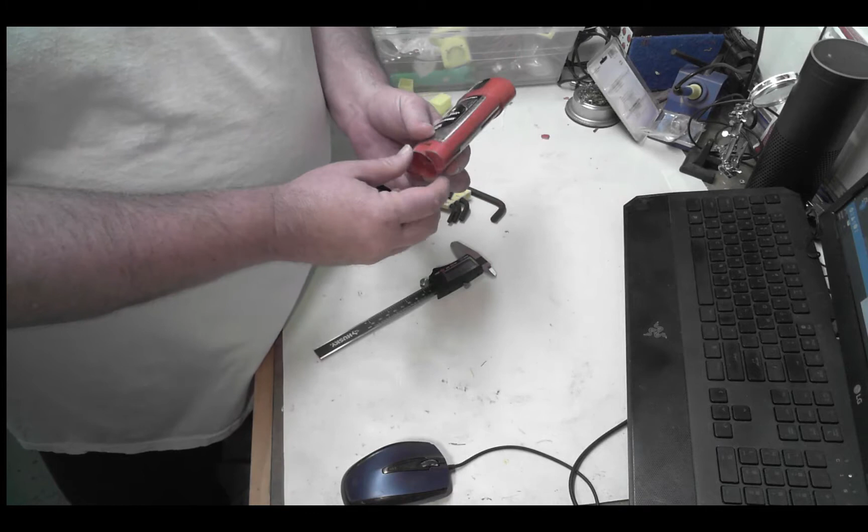So I pulled up all the stuff, started turning to get some deodorant out of it. Well, either I was going the wrong way or something was defective. This thing snapped right off. I'm like, well, I'll just be a little stinky today.

That's okay, but the bigger deal is now I've got to go back to the store and return the thing. I just don't want to deal with that. I have to drive a lot every day to get back and forth to work, and I'd rather not deal with it. So I chunked it all back in the gym bag and decided I'd make a project out of it. Help me smell better using 3D printing.

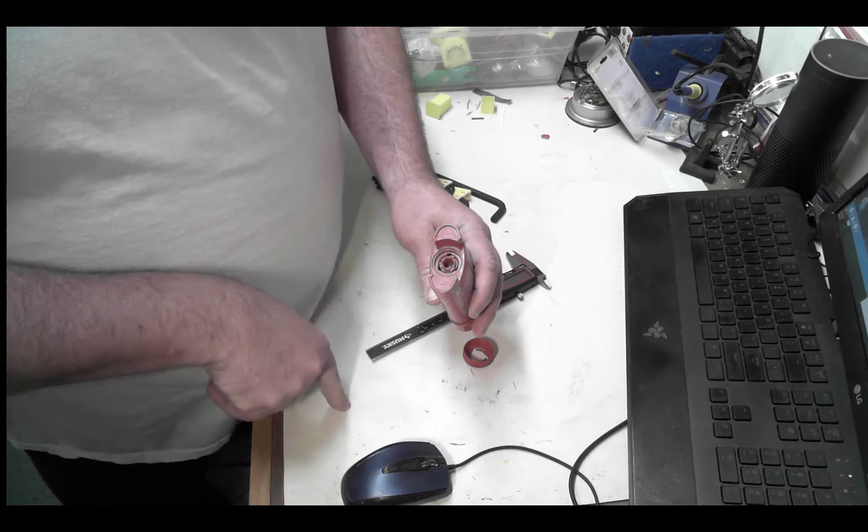So here's the deal. I got an idea how big that is, I can measure those things. I also looked - if you'll look right here, there's a hex opening. That hex opening just happens to fit a 5/16" nut. Now, I didn't pull out my metric ones on this, so maybe there's a metric thing in there, but it fits pretty good, so that's what I'm going to roll with. I got sizes of this, I got size of that, I know where it is, it's nice and circular.

I've got Fusion 360, I can make a model, and we can make myself smell better using 3D printing. So I'm going to model it up and show you guys doing that. I will show it printing, and I'll show you the results. So hang on, here we go.

Okay, so we know what the problem is. Now let's model up our solution. Pretty straightforward kind of guy. I did practice a little bit, I'll be honest, but I'll show you my mistakes and where I made them. So the first thing we want to do is make a sketch. There's a couple of ways to do this, but effectively this is a hex column on top of a round cylinder. That's all it is. So let's go do that and make it really easy.

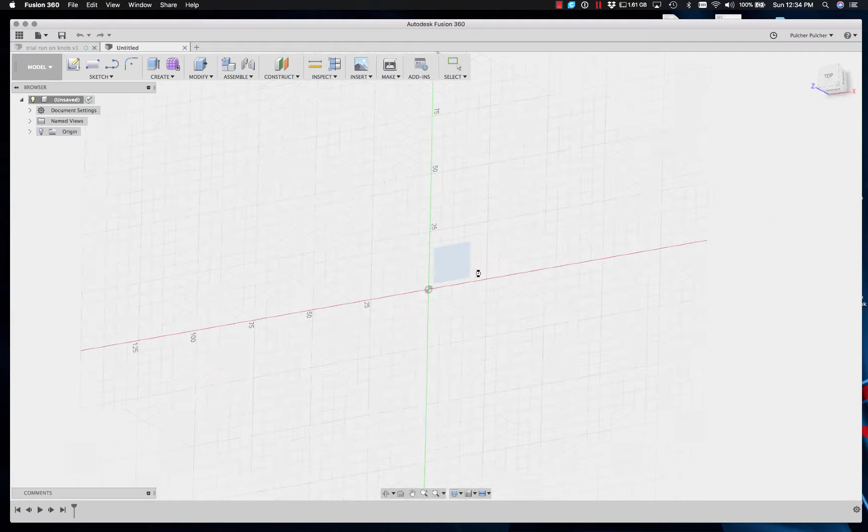So we make a circle on the x-axis. Get my calipers out. Seems I need to make this - let's call it 30. It says 33.5, and that's just on the outside of that. So let's call it 33 millimeters in diameter. So I'm going to say click. 33, tell it to go, and I need a height.

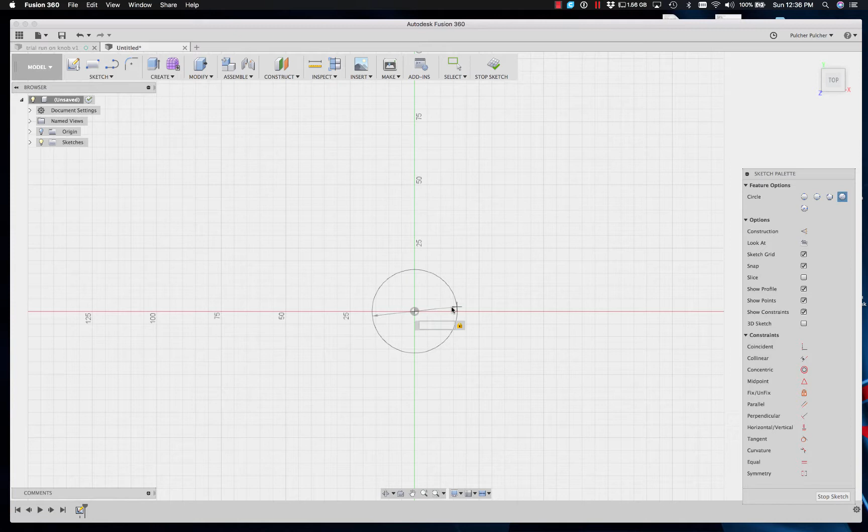It's a little difficult to get a hold of. Yeah, I'm going to call it - it says 12.8. I'm going to call it 12 in this case. Actually, I want just a little shy of that, so let's call it 11 this time. Alright, so then what we need to do is - that's 33, see we're all dimensioned up, which is great - and we can do this press pull business. Select this, I want to make a distance of 11 millimeters. And I'm making a new body, which is fine. And away we go. Dude, we're almost done.

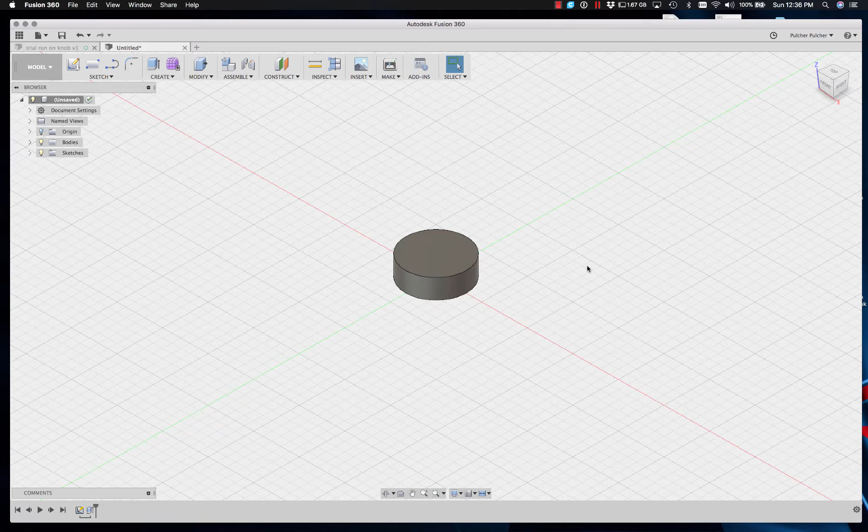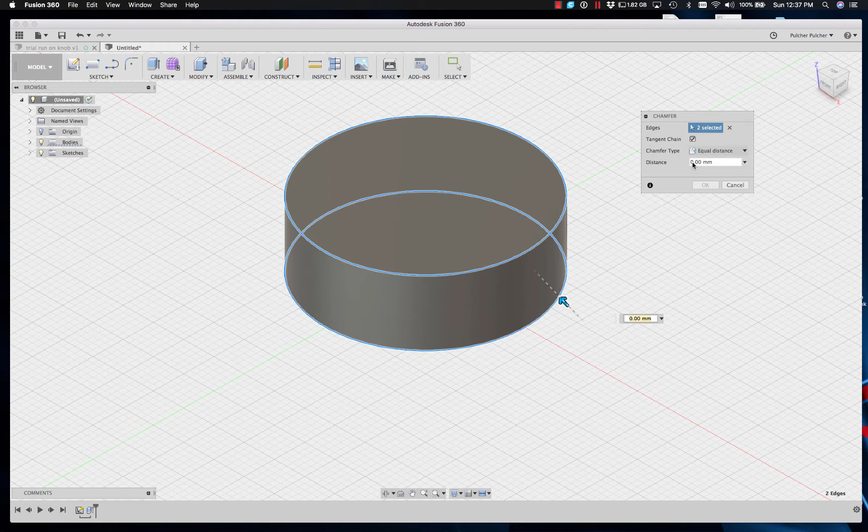No. Let's do a couple things first before we go any craziness. So I'm going to zoom in here. One of the first things I want to do, I want to grab that line right there, and I want to grab that line right there, and I want to make a chamfer, and I'm going to make the distance - what's 2 millimeters look like? Look good to you guys? So now what we have is a chamfer and a nice little donut here. Back to my home, make sure I'm looking at the right thing.

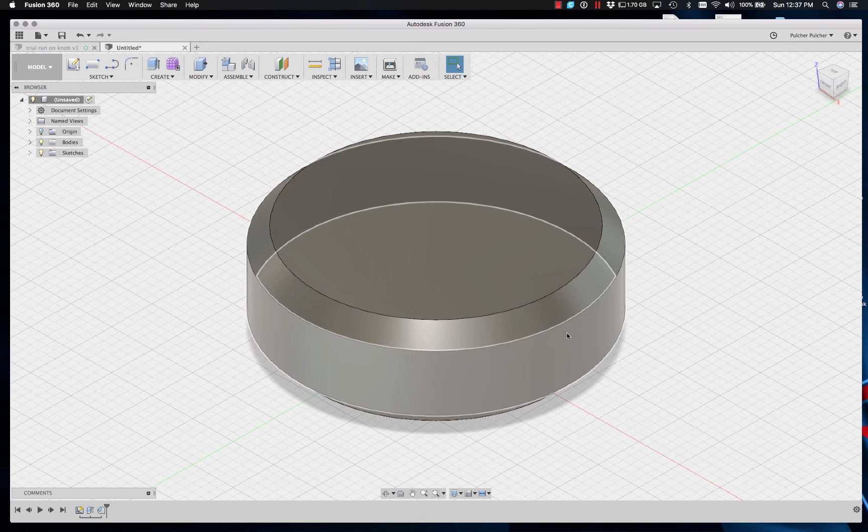Now the next thing I'm going to do is I need to make some indentation, because that's smooth all the way around, and you know when you're getting out of the shower and your hands might be a little moist, you need something to grip onto it.

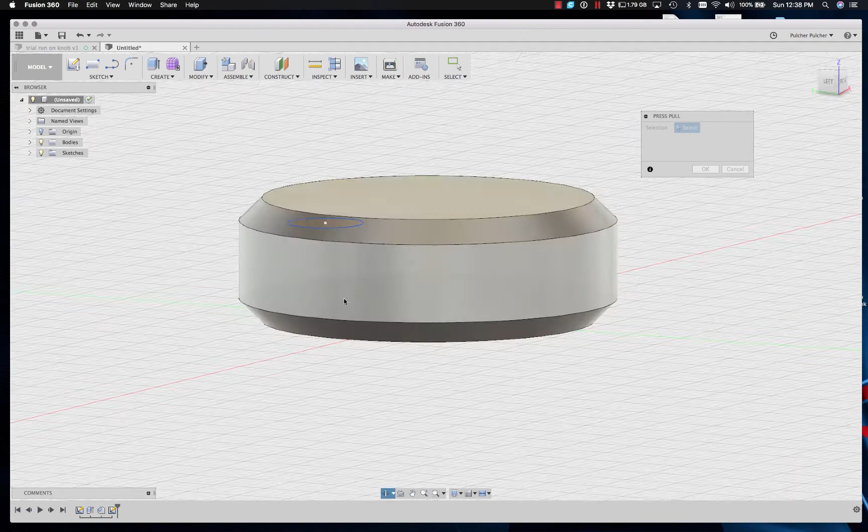So let's make some indentations on that. Start a sketch, and we're going to want a circle, and I'm going to do a center point circle. Okay, move this around a bit. Now it says it's right here where I'm at, but I'm not going to want to put it on the sketch. I'm actually going to drag the circle out here and rotate it in. Alright, then I'm going to do a press pull on this. Put this thing around so I can see what I'm doing. I'm going to select my surface and pull. And because I'm going through the object, it knows I want to cut. Okay, cool. What do you think about that?

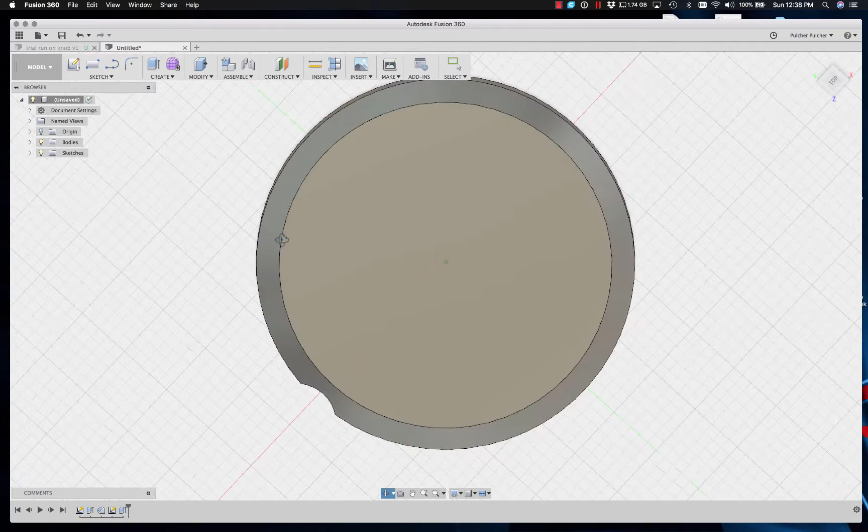Nice little indentation, not that big a deal. However, those edges are a bit sharp and we can do it a little better. So I select that edge there, hold down the shift key, select this edge here, right click and say give me a fillet. 1mm fillet, what do we got?

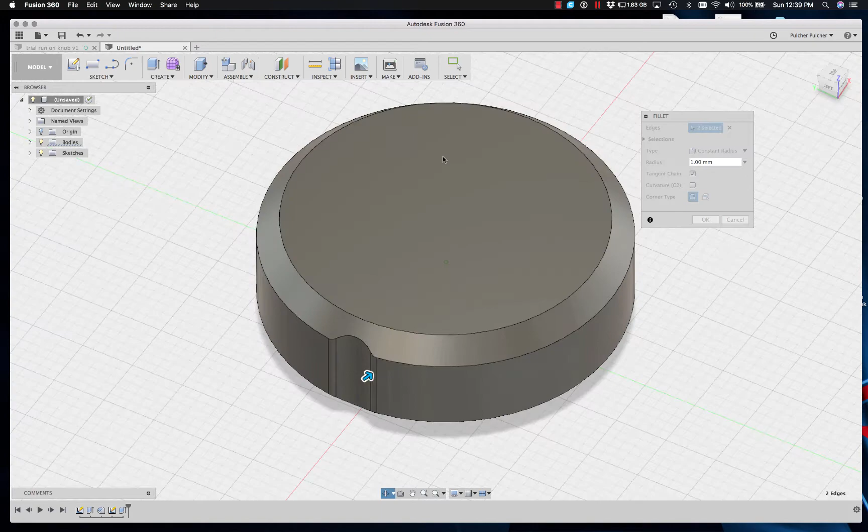A nice little rounded edge of that. If I give it 2,

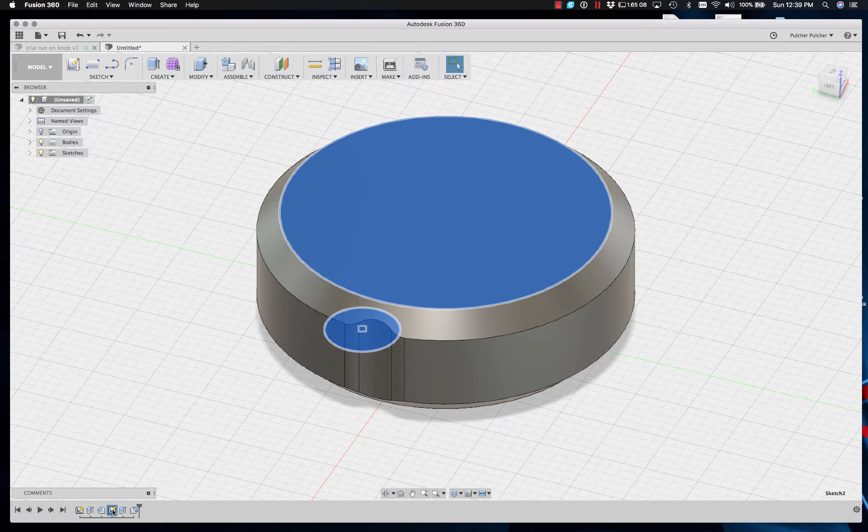Actually, I think I want that hole a little bit deeper. So I'll back up to that instruction and say edit sketch. And this one, you do that. I don't want this one. Wow, a little deeper than that.

So let's do this. Give me a dimension on that. Let's go 7. About 8, just double clicking on that dimension line. I think that's pretty good right there. Look, it looks way better.

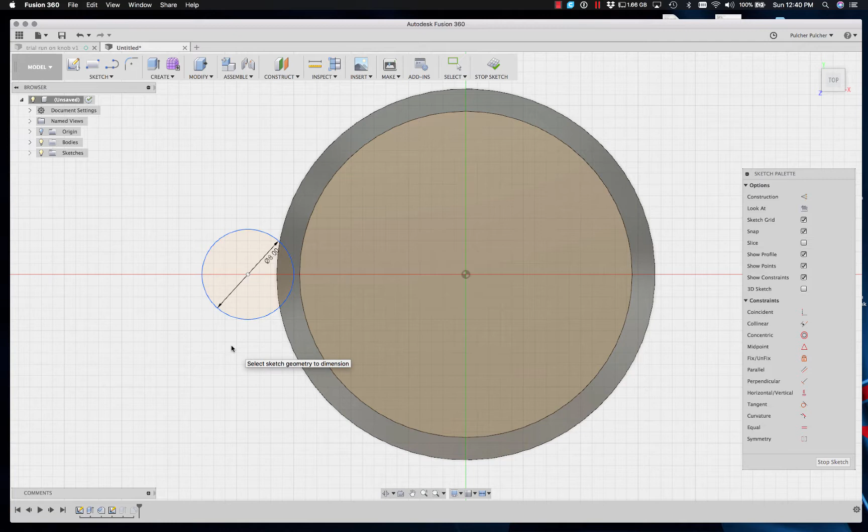Cool. Now we stop all this sketchy. What do you guys think about that? Pretty cool, I thought it was pretty cool.

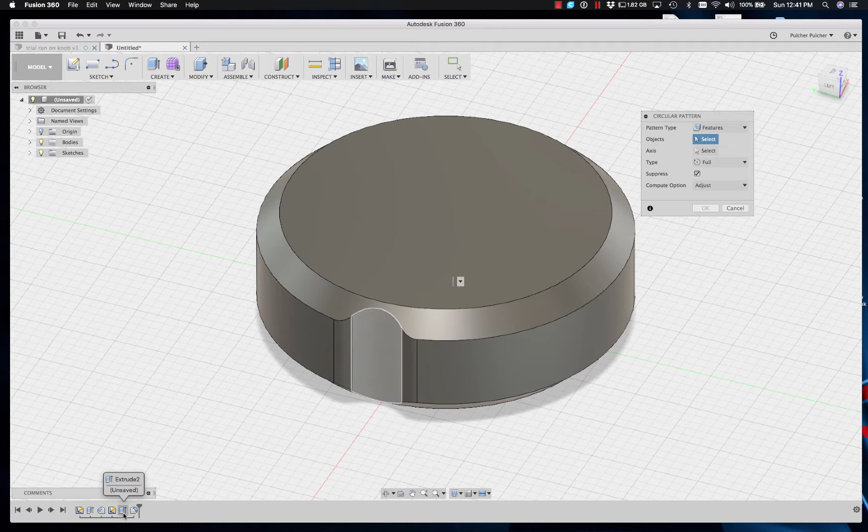We're back to where we are. Now what we want to do is create a pattern. So we'll go into the create pattern and do a circular pattern. We're going to select features, and the features we're going to select are that extrude and this fillet. So you see what we've got selected there.

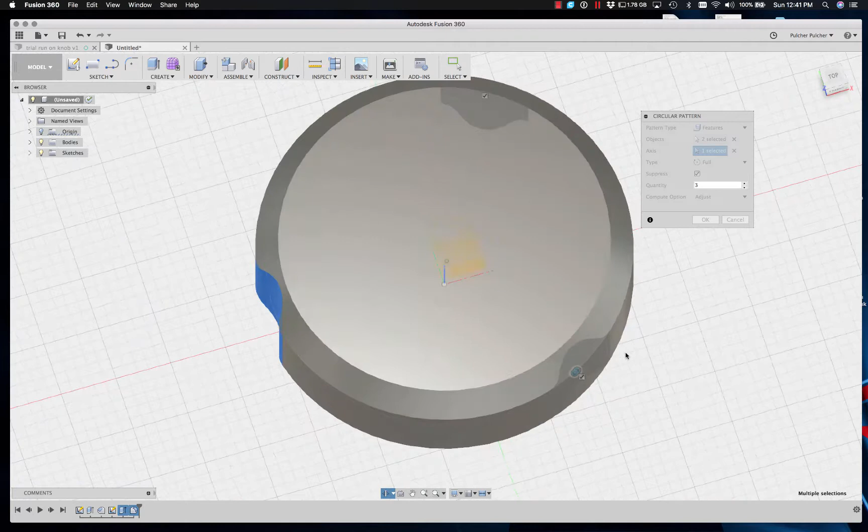Now we need to select an axis, and everything needs an axis. In this case, since I put this at the very middle of all this, I can select the Z-axis. Now what you'll see is already it's giving me 3 places it's going to be. So I can sit and rotate up to 4, 5, 6, 7, 8,

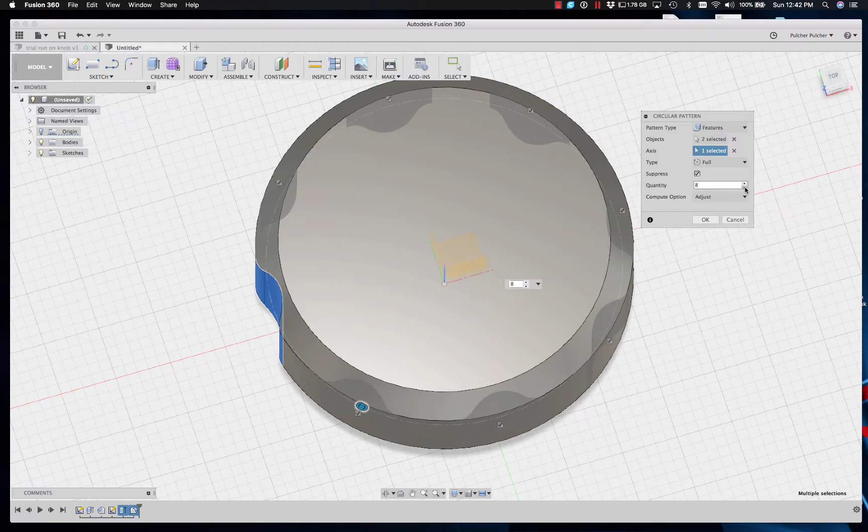9. When I was testing this, I went up to 12. That seems a bit much to me. Seems a bit much, what do you guys think? No, you can't answer me right now, this is recording. But I think 8's pretty good. I mean, as far as knobs go, that's a good looking knob.

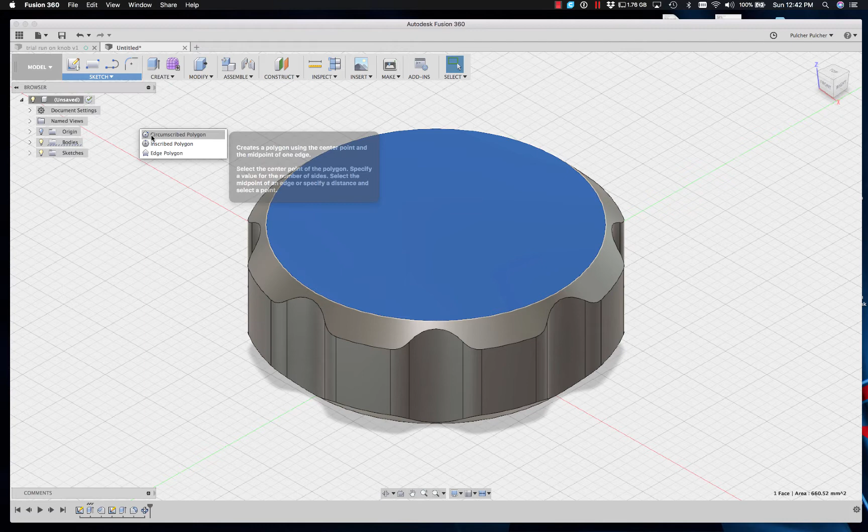Alrighty, now. Next thing we need to do is put a bit of hex nut on the top. Select the plane, we're going to sketch up a polygon. We want to get a circumscribed polygon right in the center because that's how we roll. Now, because I've done this before, we want 6-sided, so it gives us our hex.

Also, when I initially played with this, I felt the 5/16 inch hex key actually fit better. It went further into the hole because there's a slight taper to the hex hole. I'm sure that has to do with centering up and that sort of thing, make things easier to do. I backed off of that just a little bit so that it actually absolutely fits the hole. I felt I could get further in and give a little more control to make the thing just a little bit taller on the axis there, with the 5/16,

and that 5/16 measurement is across the flat, just under 8 millimeters anyway. So 8 millimeters there, 5/16. Oh no, that's 8 millimeters. Sorry, just shy, 8 millimeters versus 7.94. So we're going to go right at 8 millimeters across there.

So as we come up here, I am going to tap in. This is a radius, not a diameter. 4 millimeters. In fact, I'm going just a little shy here. 3.94.

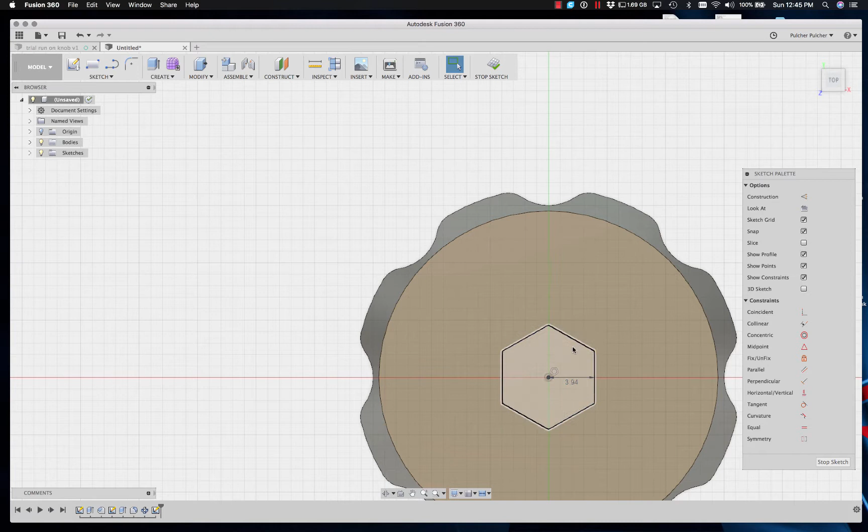So what is 3.94 times 2? That's 6 plus another 180 plus another 6. It's 7.88. So right at 7.9 is what we got going on there. So that is our hex nut.

I'm going to stop the sketch. And now we're going to do one of their press pull things. And because I've done a little measuring, that measure needs to be about 8 millimeters tall. I'm going to go just a little, 8 millimeters, good. 8 millimeters tall.

And because I know there's not going to be a lot of strength on this, not going to be a lot of twisting or whatever, but just in general practice, anytime you have a hard right angle like that, and you're going to be twisting things, that's where all your force is going to be. So I want to go in here, more for aesthetics than anything else, and just general best practices. I believe it's a general best practice.

Right click, put a fillet in there, and we're going to do a radius on that fillet, 0.5 millimeter. Yeah, that'll get us a couple of layers of a slope up into the flat. Actually, if I did 0.6, that'd give us 3 layers. We're printing this at 0.2 layer heights. So that's good. And then of course on the top, I can't leave that go untouched.

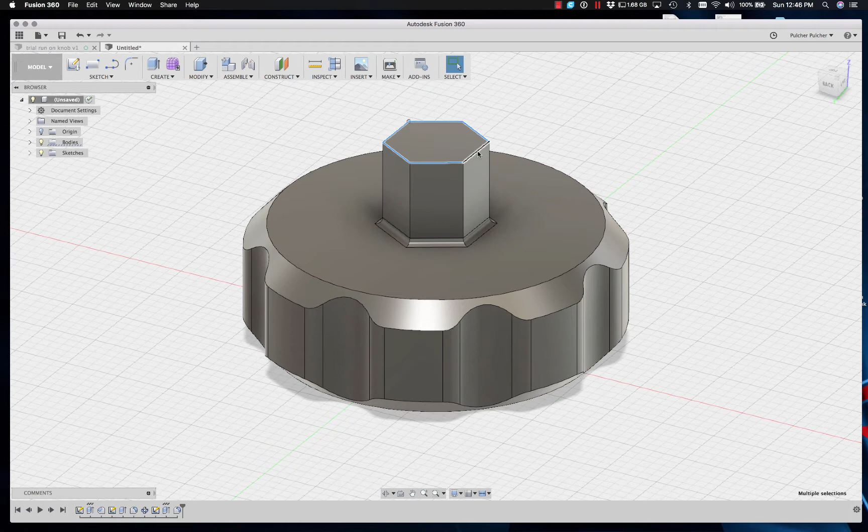We're going to chamfer that a bit. Let's see what 1 millimeter looks like. Oh, it looks too much. Let's give it 0.6 here, so we get 2 or 3 layers of that. So there you go.

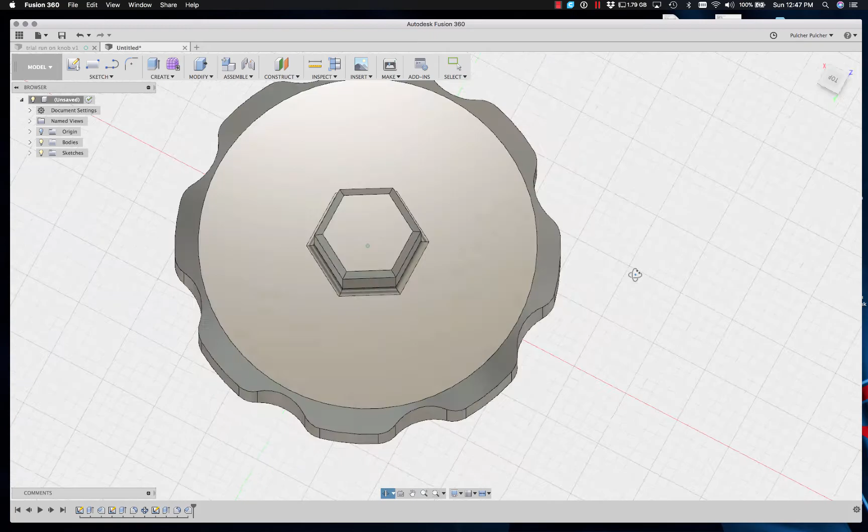So you guys, that's our nut, all lined up.

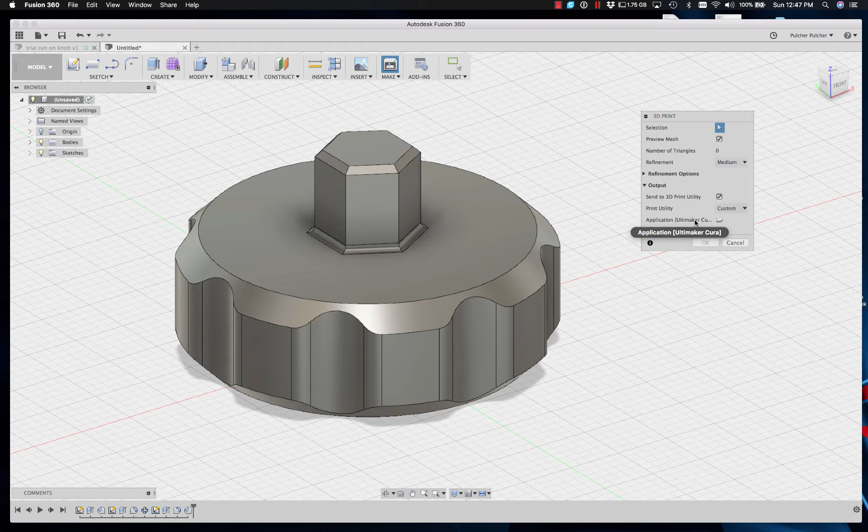And then we need to make it. So I've got Cura already fired up here, I'm going to say 3D print. I have Fusion 360 already set up to go to Ultimaker Cura, which is what they're calling the Cura 3.1 and above stuff, it used to just be Cura. I'm going to select the object. It'll give me a rendering of all the things it's about to do as far as mesh points, it's going to fire up and show all these, like everything's a triangle. People think things are flat. No, they're just big triangles. So I say okay.

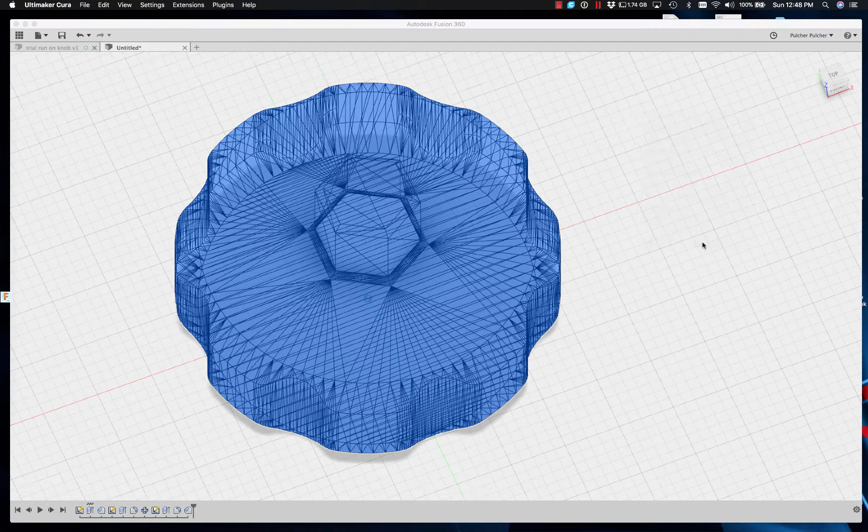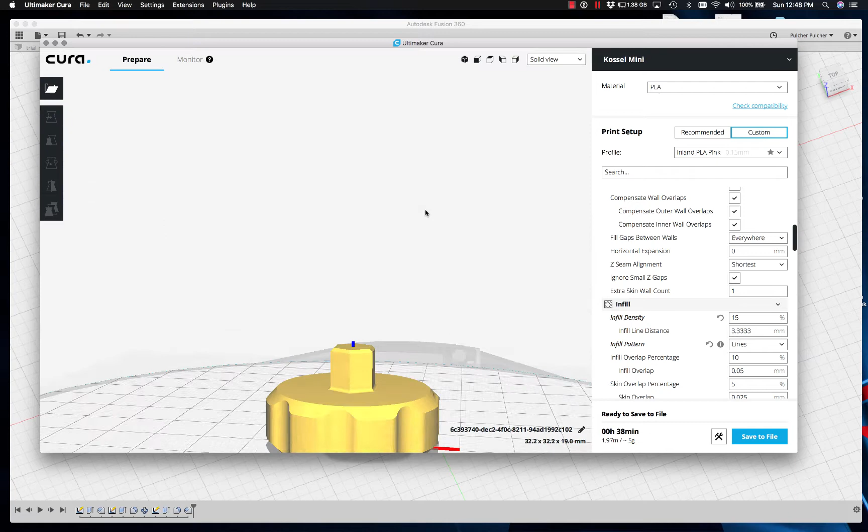So now I go over to Cura, and we have the model. I've already set a bunch of things over here in Cura. And if I take the standard solid view, you'll see what we're looking at there. Decent thing.

Go into one of the things you need to check, every print you do, you need to check this: how your infill gets laid out. Do a little bit of trial and error. I've decided about 15% infill is all it needed, and I decided line was the infill type just because I've got these big large flat surfaces as they go up. I'm doing this brim here because I'll be printing this initially in PETG, and I want to make sure I get a nice even flow of material out before I start printing the real deal.

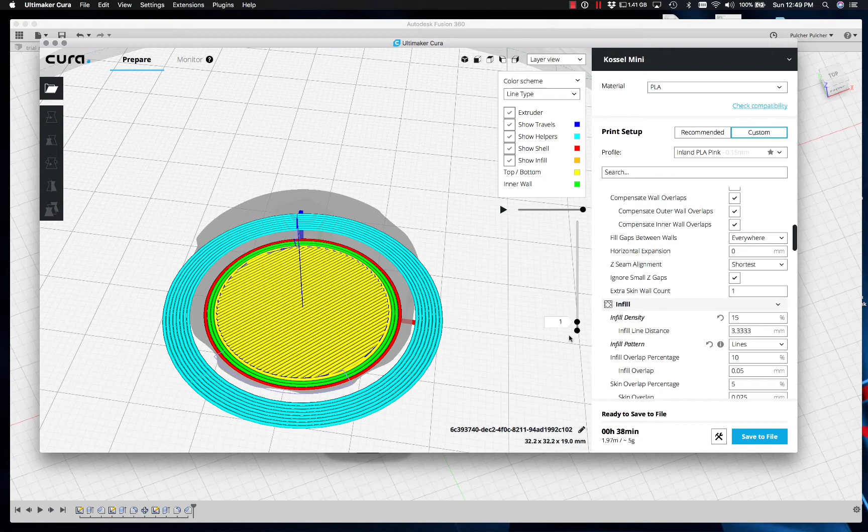And every single one of these prints you need to check, run through the layers. You can do this a couple times, you got tons of layers and everything, but I just clicked on the one there so I can use the up arrow keys, so I can go up and down by one layer at a time, so I can see how my infill is getting laid in. I can see that I've got 3 wraps, it's giving me about 1.5 millimeters. You can probably do this with 2, but I'm just, I don't know, the extra layer makes me feel good, so I do it. The bottom layer I've got set.

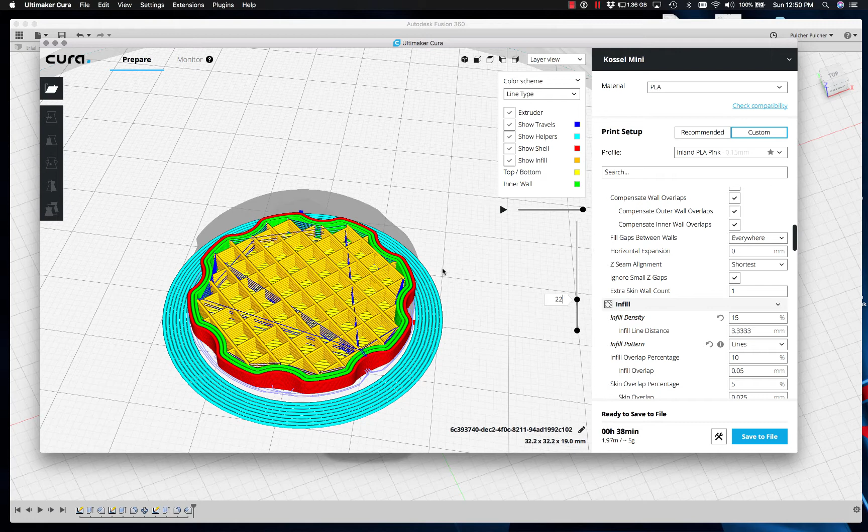I make it so that both my bottom and top are the same as my outside walls. It's personal preference, I think outsides need to be equal all the way around, as much as they can be.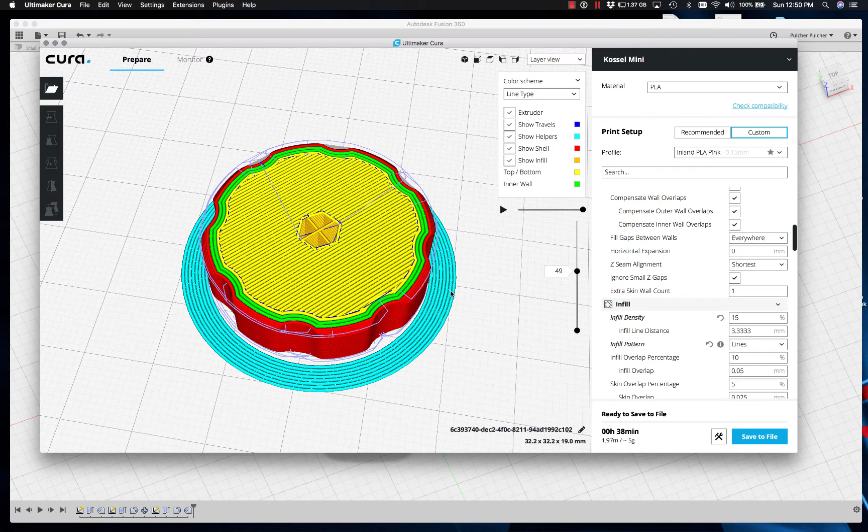So as we're going up, watching the infill as we go, this is extremely uneventful. Here in just a little bit, though, we will get some more fun stuff going on. So this is one of the reasons I chose the lines, by the way. You see, there's the first of the top shell of the nut going in, of the knob. And now you can see how it's kind of been closing in just a little bit to get to the final top shell of the knob.

And then, on top of that, because it sucked it in a bit, we've got a whole bunch of shells that's going to make that adhesion between those two layers great. And as you'll see, it sucks in 3 times, and then we start going up. And then you notice I've got this infill right here that just goes right through the middle of it, connecting a bunch of these walls, 4 of the 6 walls together. So that should be okay strong for what we're doing.

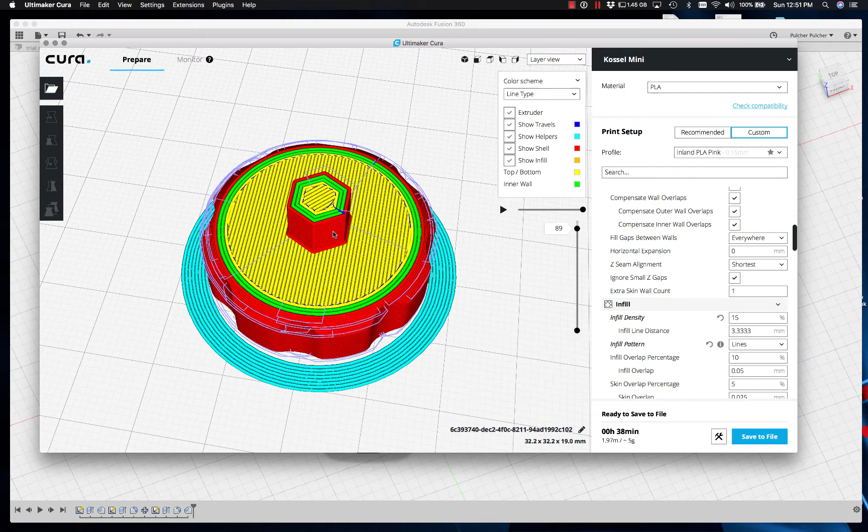As we go up, you'll see it just continue to go up, and then we'll start putting an infill. The very first infill goes across, that's probably going to be really sloppy and ugly, but the second one, that one right there, is probably pretty good. And by the time we get to the chamfer at the very top, it should be a pretty nice thing. So that is how we're going to print this thing. And then I guess it's time to do a little print action, yeah, it should be time for a time lapse.

Couple of prints of this. I had dealt with the printer a little bit, and I did a test fitting of our model. Turns out I was a little bit simplistic on how things needed to work and do, and there were some things that were going a bit crazy. So what we're going to do is we're going to change it up a little bit.

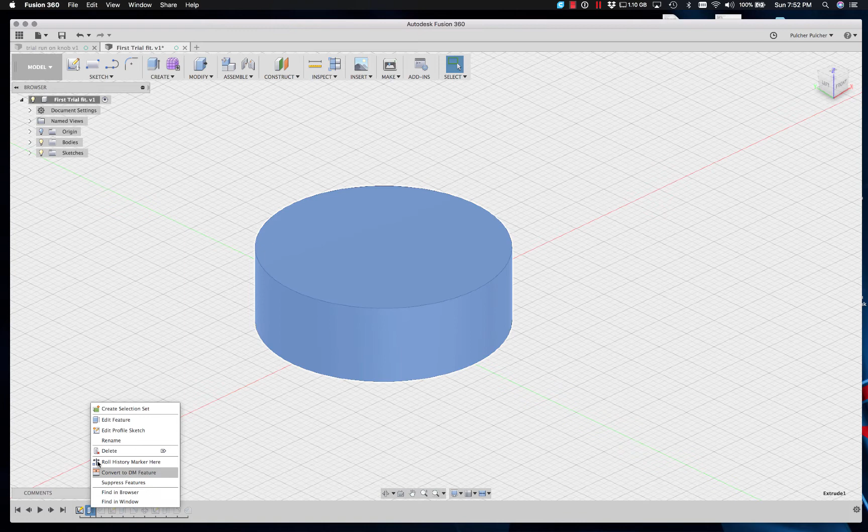All you guys that are Fusion experts, prepare to laugh at me because I'm going to show you me just trying to do this. First time we need to rewind, in fact, all the way back to the extrude. I'm going to edit the feature because we extruded 11 millimeters, we only really want to extend that. I'm going to make that 10 millimeters.

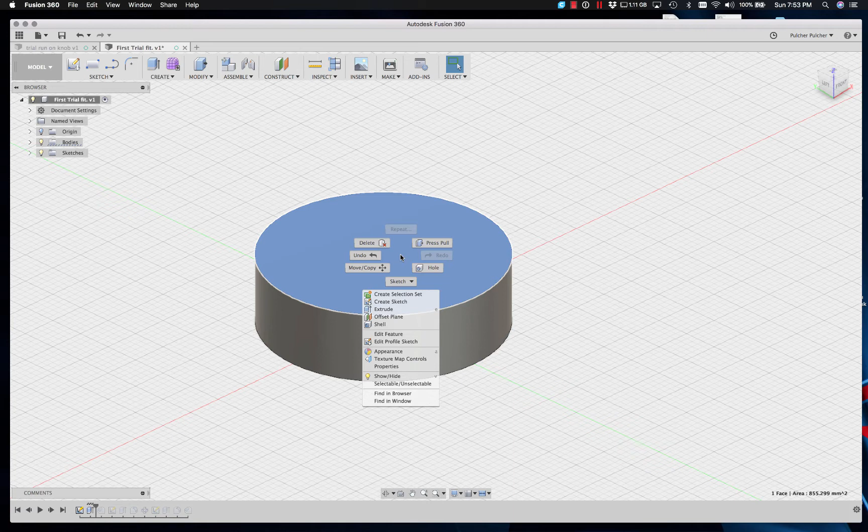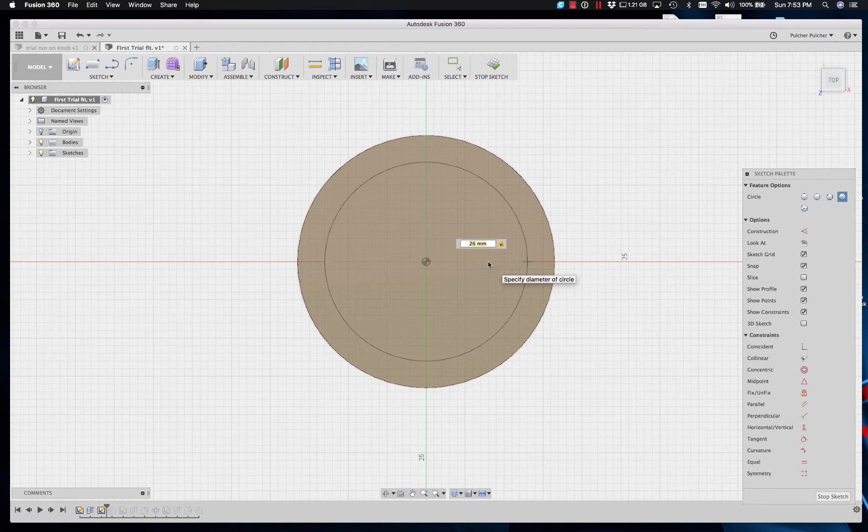Okay, then we're going to add a feature, a sketch, create a sketch. And then we're going to want a circle, C key. And we need to place that circle with a diameter of 26 millimeters. Yep. And then we're going to do a press pull on that, and we're going to make that go up 1 millimeter. In fact, no, 1.5.

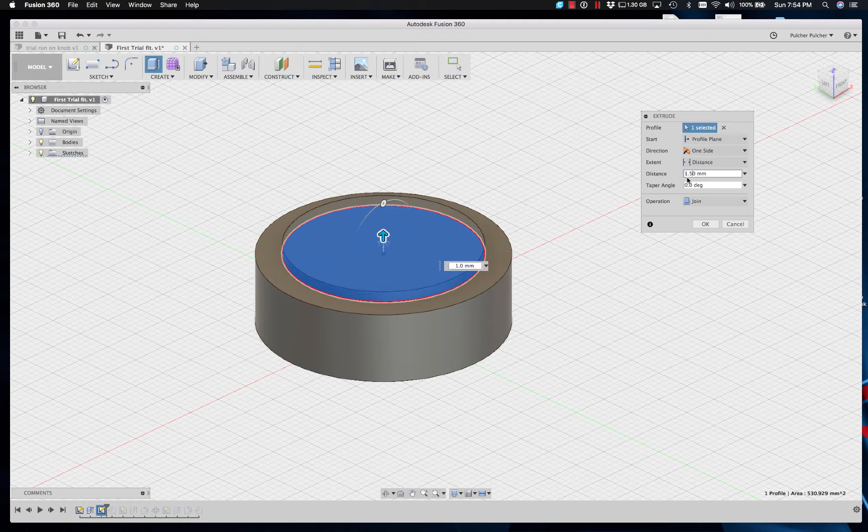All right, because that right there is an inside lip that's going to 1 millimeter seems about right, and it was making it hard to turn. That's the first of our changes. Let's see if it goes forward and does what I think it should do.

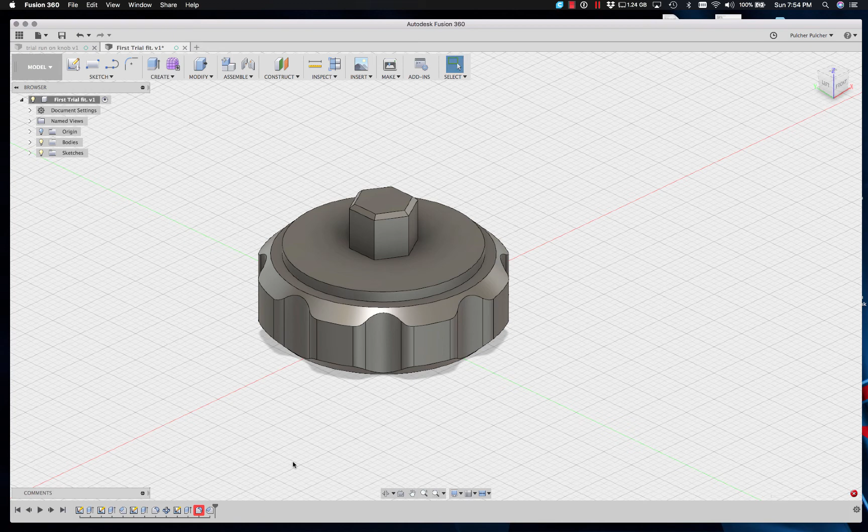Whoa, look at that bit of goodness right there. Now we're going to change that a little bit. So we got that lip going on there. All right, I think I'm good with that 26 being there, 0.2 of a millimeter on either side. We're probably good with that.

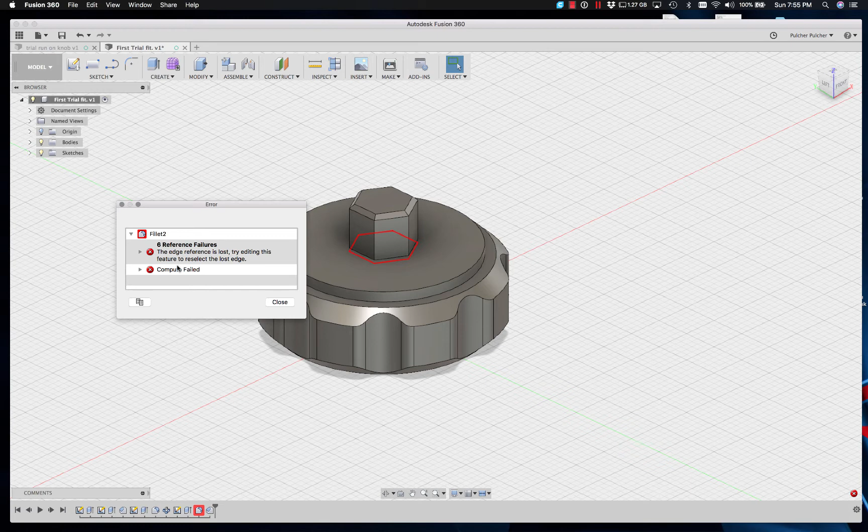Next thing we need to do - oh, that fillet's got a problem on it. Yeah, it does, I'm going to delete that. Review warning: 6 reference edges are lost. Try editing this feature again, reselect the lost edges. Okay, we can do that, and we will do that.

So what I need to do here is edit that feature. No, not that feature, this feature. Going to edit that feature.

We got it going up 8. We actually need to make it go up - that's off this bottom here, and we just took off one of them. So we need to make it go up 1 millimeter more.

All right, 1 millimeter more. And we need to make - I wonder how do you do this? In fact, I know what I'm going to do on this.

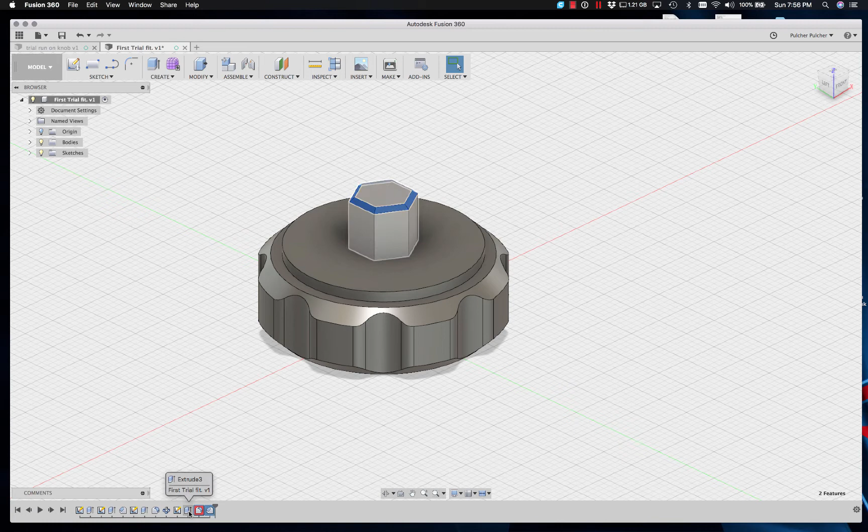Because it's such a simple thing, I'm just going to delete. Click, delete, click, click. I want to even edit that sketch. I'm just going to delete that. That's the pattern. I'm going to delete all of that because really I want to edit this screen.

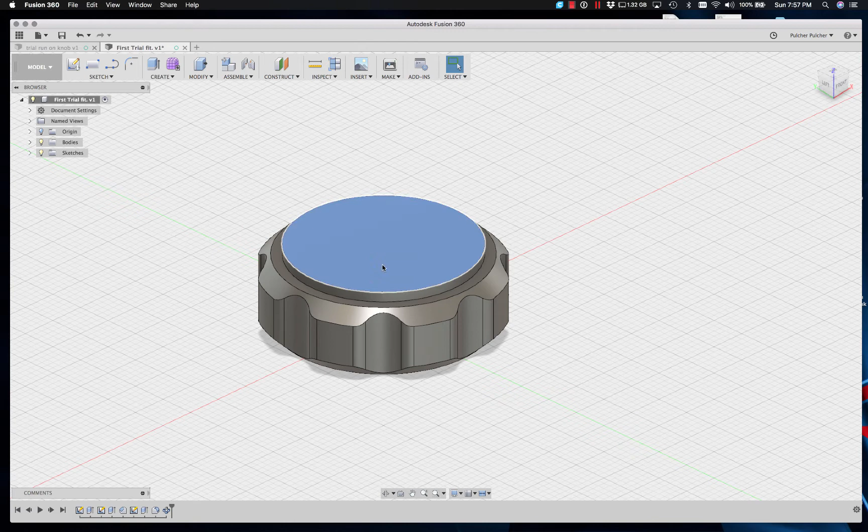And I'm going to sketch, create a sketch. We're going to do a polygon. It's going to be circumscribed. Click here, 4.2 millimeters.

Because it will shrink slightly, because I measured across the flats in the internal - the very opening of the hex entry in the bottom of the deodorant, and that read 8.44 millimeters. So that extra tenth of a millimeter, I'm going to give into slack. I'm going to call that done.

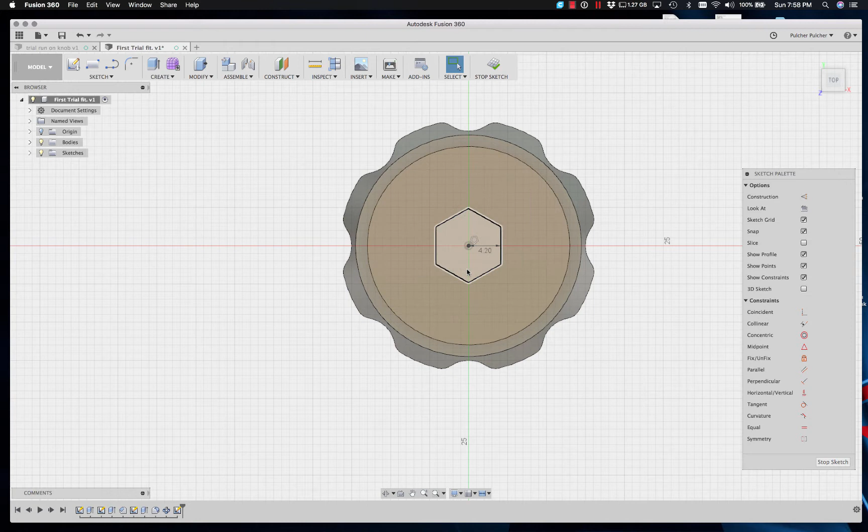I'm going to press pull this. We're going to go up 8 millimeters. Okay, we have a taper angle, and yes, we need to do that.

How many of you guys got your geometry close at hand? I'm sure that Fusion could do this, in fact I know it's my inadequacy. So let's see if we can do a little Bing search. I'll show you the good and the bad.

So, right angle triangle calculator. Well, cool, I wonder if this thing's any good. No idea, don't even know who they are.

Okay, so look at this. Angle 60 degrees, and it gives me the A and the B. So we'll use C as our right triangle here, so that'll be 90. One side is going to be 0.44, the other side is going to be 8. Right? And I say calculate it.

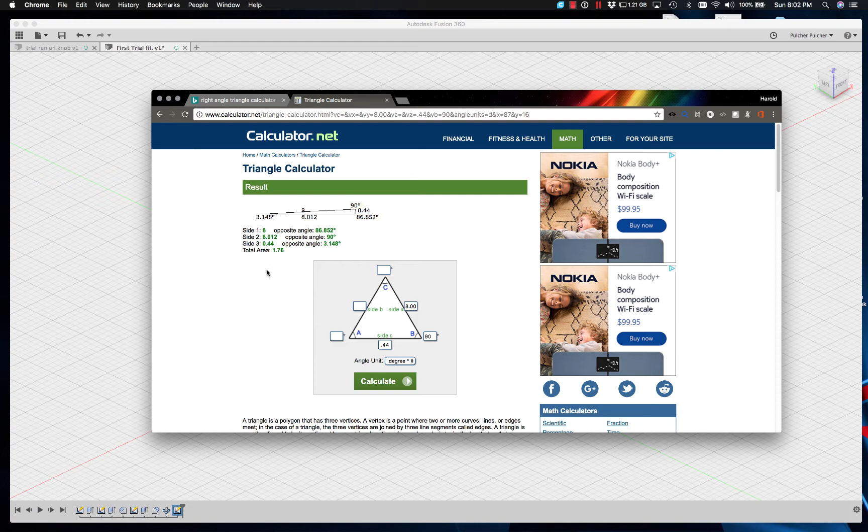Look at that. It looks as though the taper angle on this - because we got to taper it in - is 3.148 degrees. Wow, let's see what happens. It's either 3.148 or 86.852, depending on how Fusion's done this. This is the first time I'm ever doing this.

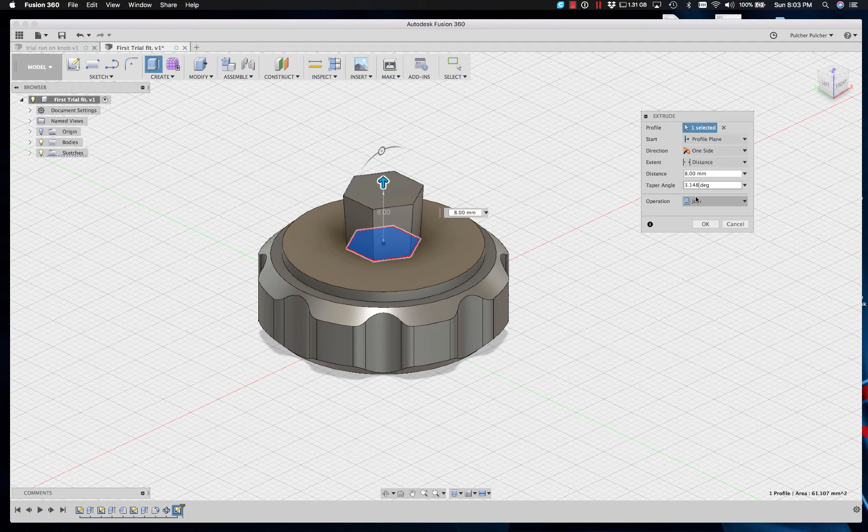3.148 degrees. What happens? Well, almost what I wanted, it got bigger. So let's edit this feature.

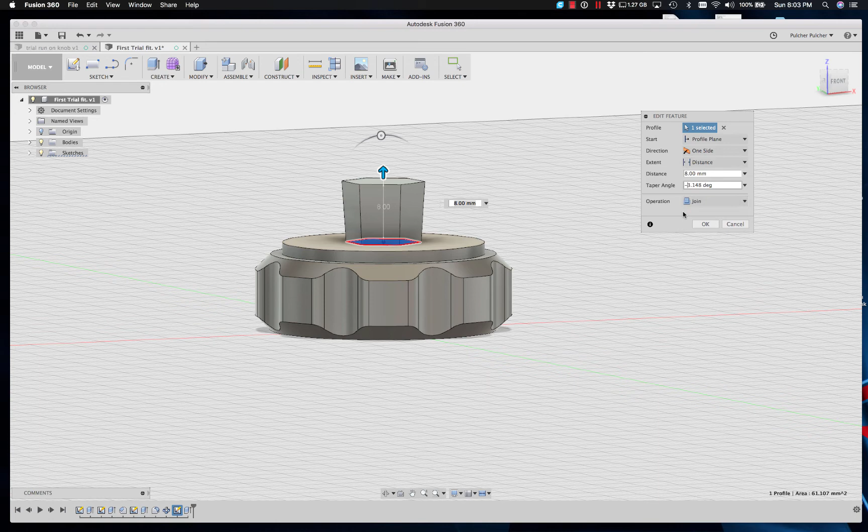Minus. I think that's more what we want. What do you think, fellas? I say fellas - guys, folks, peoples, human beings. I think most everybody's included in one of those groups.

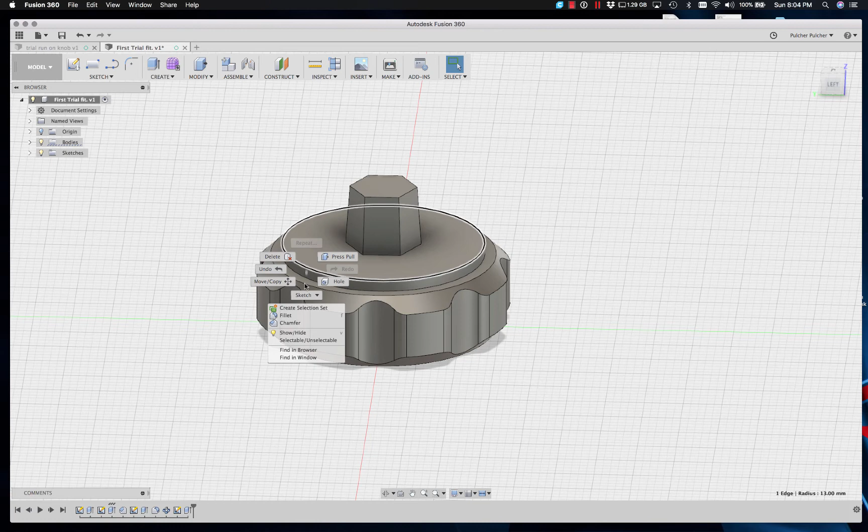Okay, I'm going to do a couple of things now, just some little smoothing things. That's no big deal, I think that looks actually really good. And so let's do some things like we were doing before, a little smoothing. I'm going to put a little fillet on here.

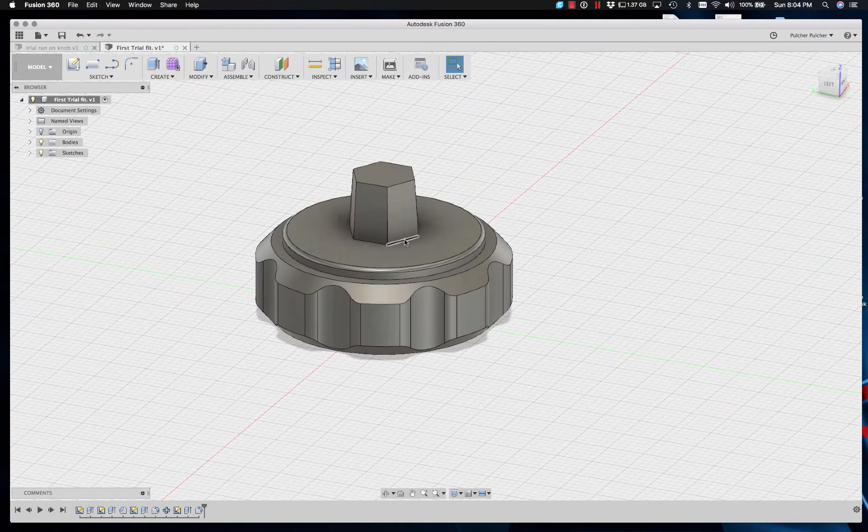Just so it rounds over. Me and sharp edges don't get along too well. I'm not going to do much there - 0.5 millimeters, 0.5. That looks pretty good. Round it slightly, and then we're going to select every one of these.

Oh, that didn't do what I wanted to do. No. We're going to fillet those. Why did we do that? Didn't we do 0.6 on that so we get several layers before?

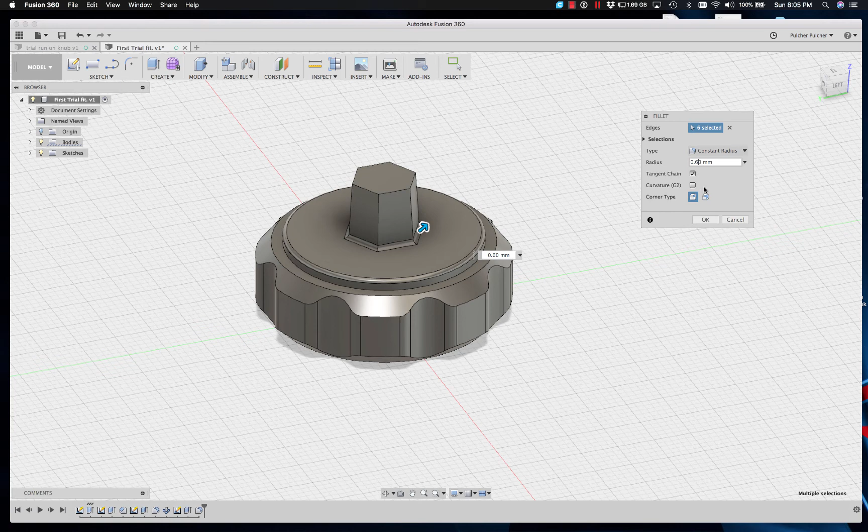And then we're going to do the same thing we did up here, just clicking the edge and holding the shift key, and we're going to chamfer those. I think we got another half millimeter or so - it's 0.6 again, see what we got. That looks pretty good, I think it looks really good, in fact.

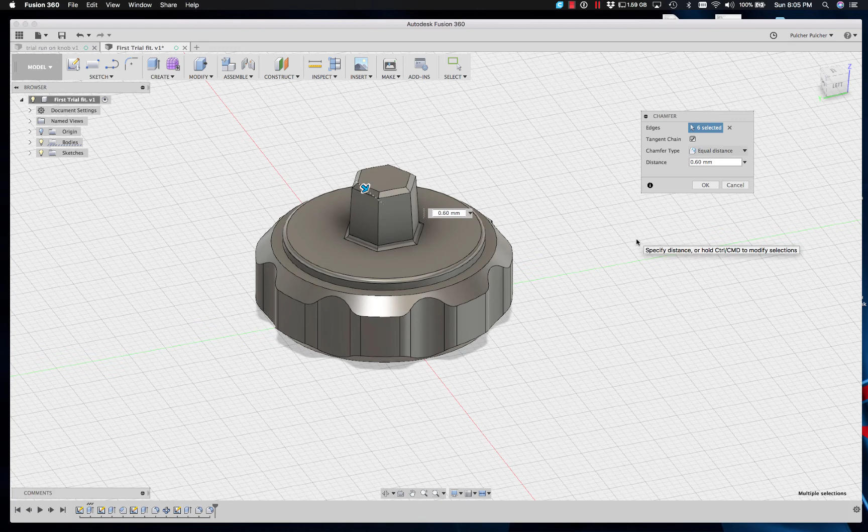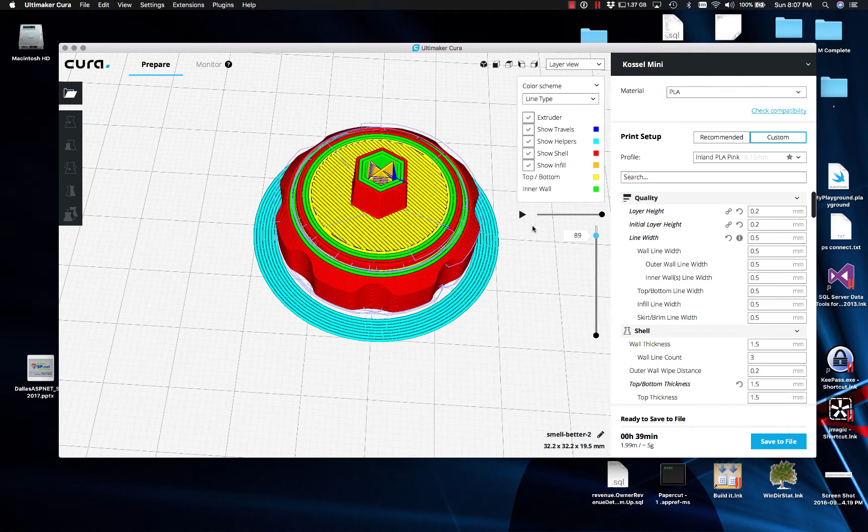So what we're going to do now is go print this out. Go over to Cura, open it up, let it slice. It's a little different than before, not much. You can see that we're still getting our nice X hash in the middle there.

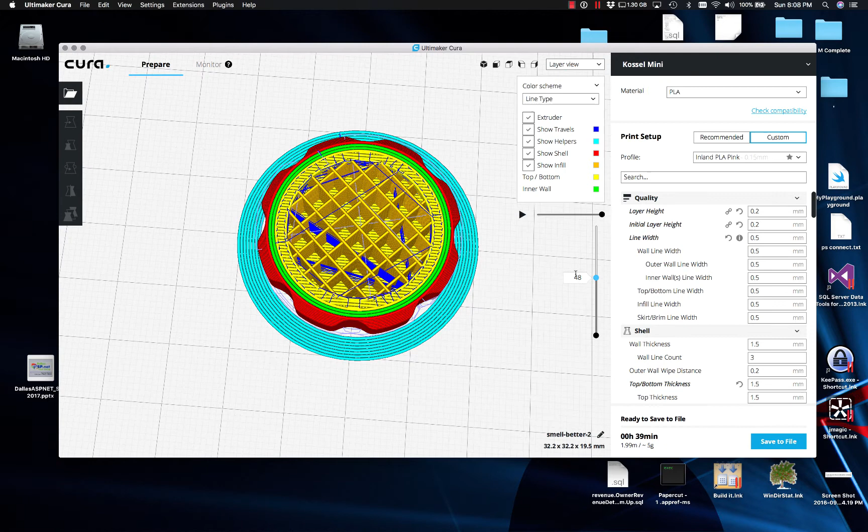Take about the same printing time. You get that nice ring that goes around. Oh yeah, I bet that's going to be awesome. Okay, here goes another print, the results of all the stuff I've been playing with.

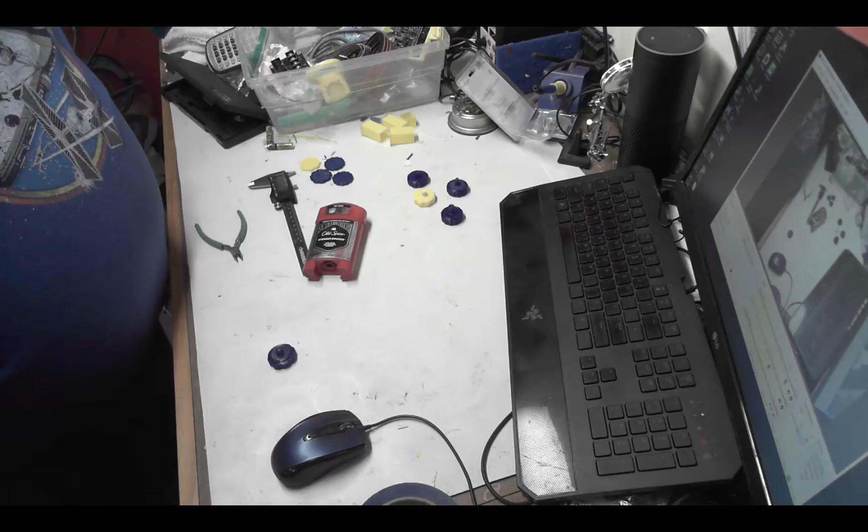It's been a little while. You see I've changed shirts, and I've got my other printer going in the background doing another project. So let me show you the good and the bad, as I always promise.

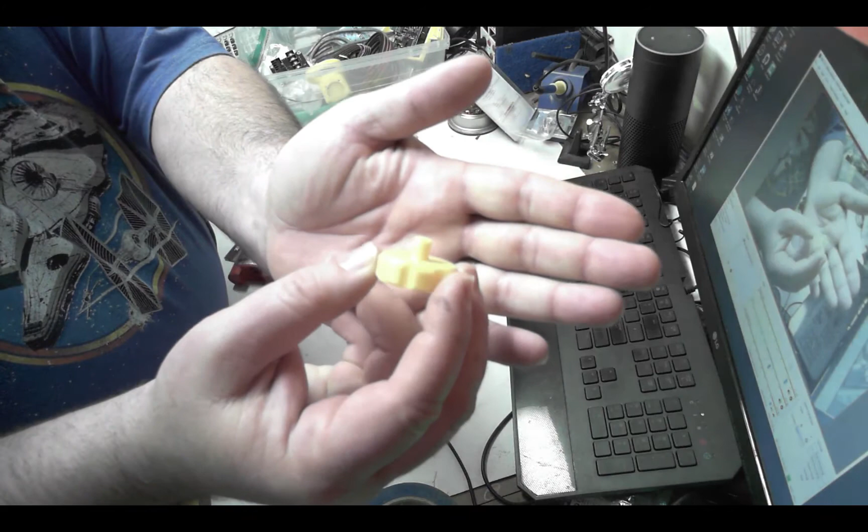That's maybe a little better. Okay, let me get it focusing in.

You see, I've got some heat issues on the thing. I need to set up my other camera so I can get a better close-up. But actually, it came out pretty decent. But it's actually kind of a busted print because it's still not going together.

I had a weird thing where Cura was stopping -- well, both printers would stop for some reason, and I think it's because we got bad G-code. So I just restarted Cura, wiped out my file, sliced it again, and then I started getting these prints out.

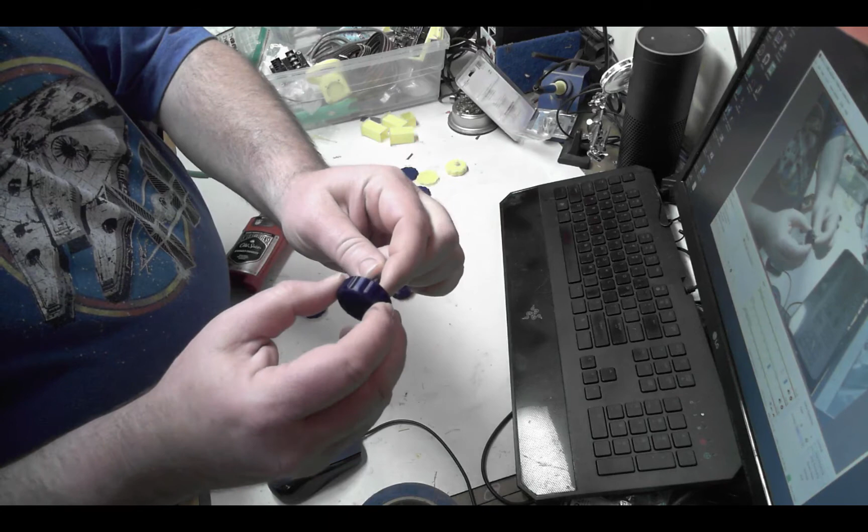So this was the first print, where I mismeasured, and I got a really sloppy hex thing there. I don't think I was blowing enough fan -- I wasn't blowing any fan at all, actually. On this small stuff like this with PETG, I think because the layer time is so small, you really probably need a fan on that. That's okay though, because that's too small anyway.

My next attempt was this one -- lots better. Of course, all this has been really good and has a nice sheen to it. But it was too tall and didn't fit in very well, and so we chucked that away too.

Okay, this was the next attempt, and it actually worked. So you see the hole there, this thing goes in. The problem is it butts right up against that thing and didn't really want to turn very well. I couldn't tell what was going on, whether I was actually turning or not, and I couldn't really see. This thing is really just riding on this up here, so it was really hard to tell what was going on.

And I learned from that -- these sides here, I did straight up and down, you saw that in the video working in Fusion. I thought maybe that would be good enough, and in fact it probably worked just fine. I put a little glue on this stuff, enough glue to suck it in there, and it would work just fine. However, I didn't want to stop there, so that goes away.

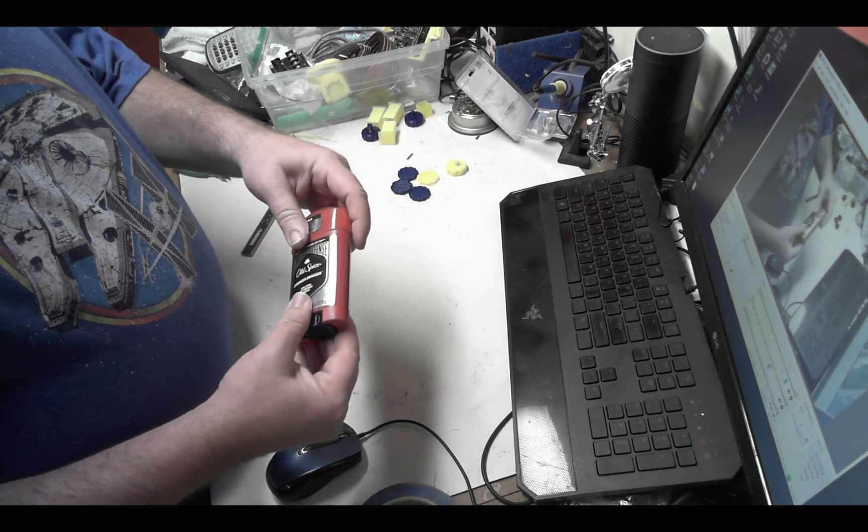And you put it in there, and it fits. It's a little bit of a slot there, but in the whole scheme of things, I glue it in there a bit, and a few more turns. Oh, I was going the wrong way -- that's probably why it broke in the first place.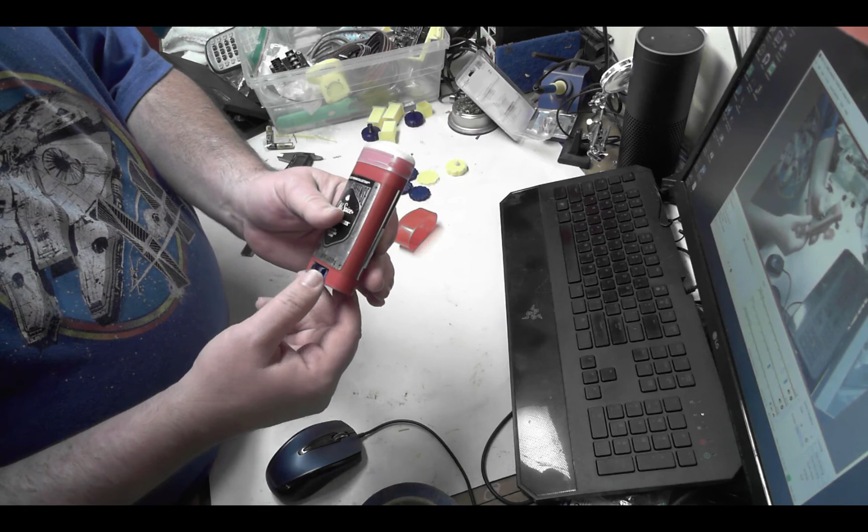You think after all this deodorant, I'd have figured it out.

Oops, wrong way again. It can only go one of two ways, right? And when I get done with this, I'm going to glue this together, and I will have me the most expensive -- there it goes.

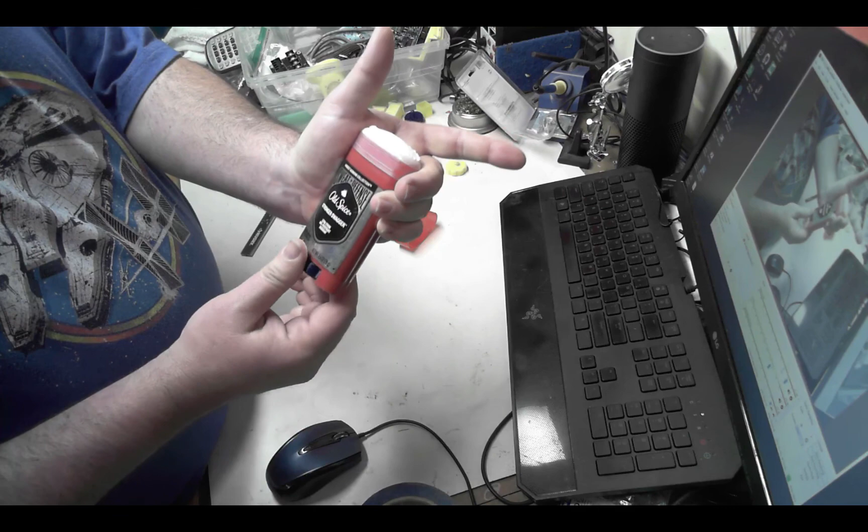See it squirting out finally at the top. I'll probably have the most expensive three dollars and fifty cents worth of deodorant ever made. But I'll smell better, and I used 3D printing to do it.